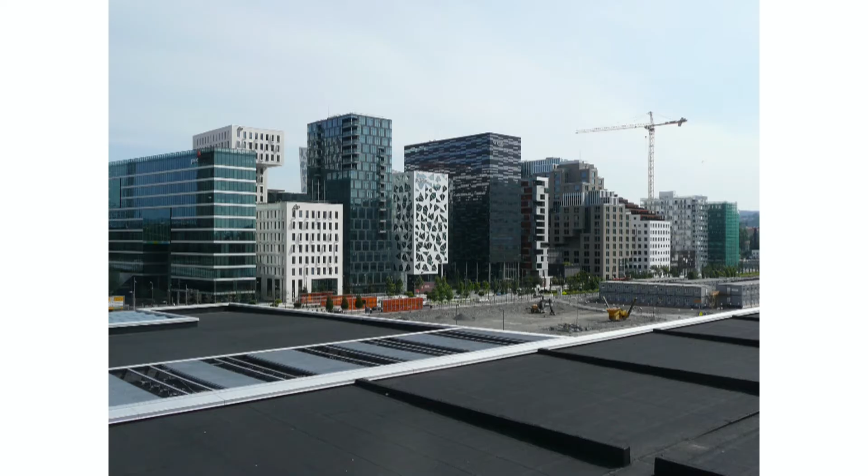They are in opposition, in contrast against the traditional buildings, and we shouldn't be afraid of this contrast.

This Philharmonic Hall in Zaryadye is different from anything that surrounds it, but 80% of a city consists of buildings that are different, and constructivists in the 1920s understood that if we have one high-rise and it's like a disruption in the city, in a new city...

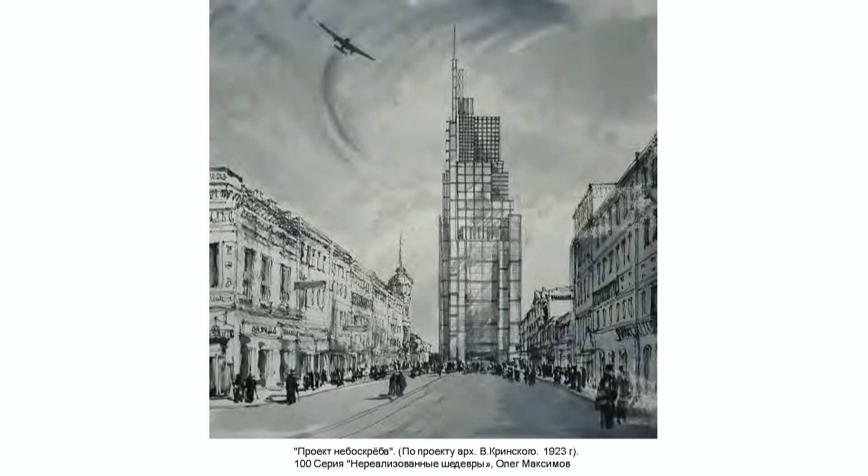Then you think about what do you do with the remaining 70 or 80% of the city. And in my buildings, I always ask myself the question: can this building become a disruption, or should it be a background for something else?

Using this counterpoint, this opposition, is how we build our cities. If the building is in opposition to everything around it, it's complicated in its shape and form. It could be complicated in its materials, can have some unusual materials.

For example, in Nevsky Prospect in St. Petersburg, if we have 100 buildings, we see only 16 houses that stand out.

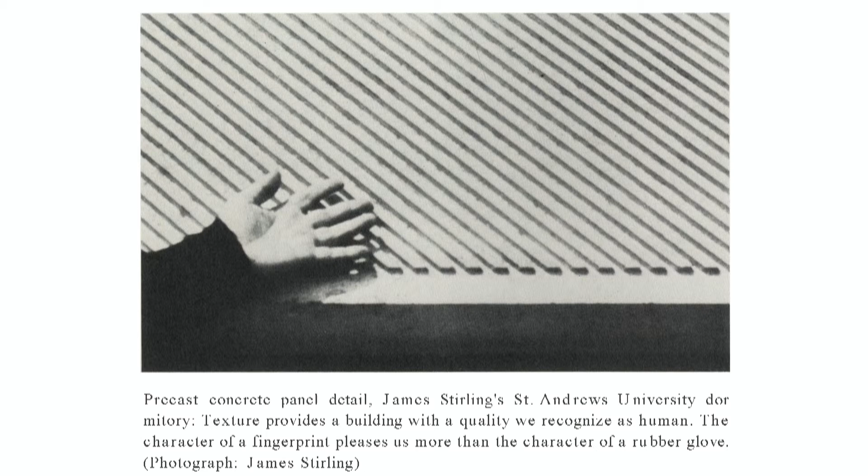84 buildings, they are quite boring and regular, but they are still precious to our eyes, because as Stirling used to say, they live their own life with their own surfaces. Their facades have fingerprints, not the prints of a rubber glove.

And such buildings always existed. You used to work with materials, with details.

Every facade has its own structure, and we have fingerprints here, not prints of rubber gloves, and this is what creates attractiveness. This is a good addition to regular rectangular investment architecture.

This is that skill that we really need to use in new cities. Otherwise, they will turn into this chaos of complicated, contrast-based forms that are not really close to people.

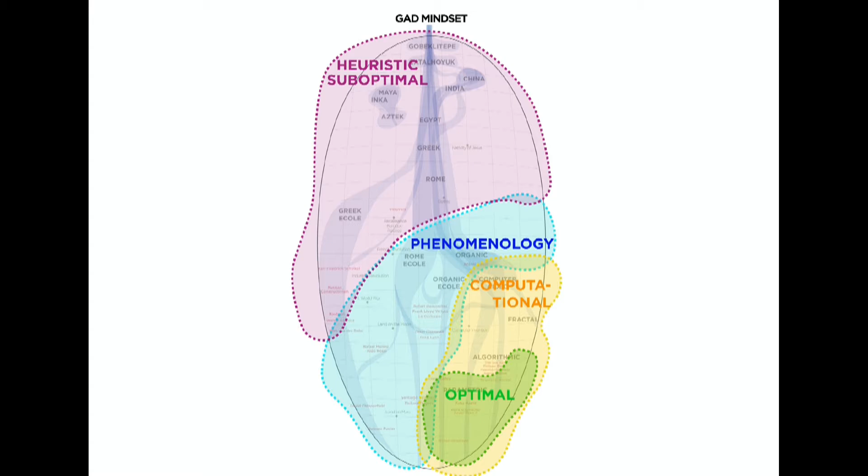We would like to organize it for young people, a young habitat, where almost 500,000 people will live. It's next to the new airport, and the city happens as another piece of new startup companies—can we show it quickly?

Because they asked about Media City, let's start with the Media City.

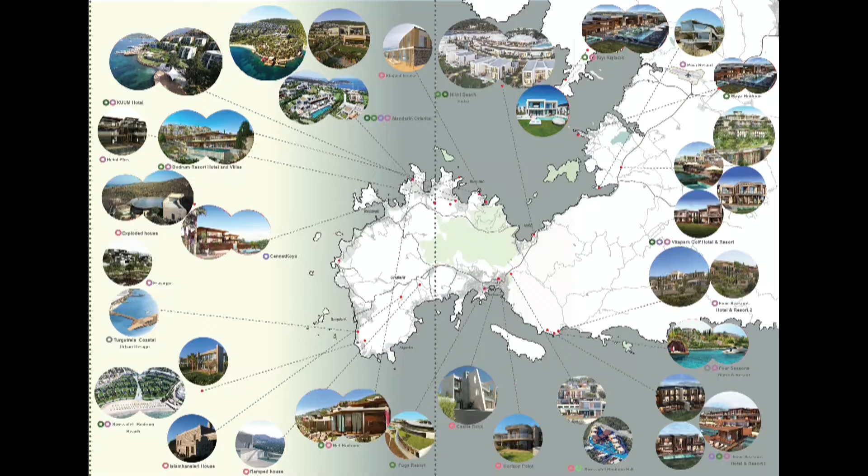We searched what is today's city, and in history, what will happen—especially a couple of things: the housing, and also the working area, and the square. We need green space, we need event space, and also we need working areas. We searched first of all how we can combine them, especially surrounded by some square.

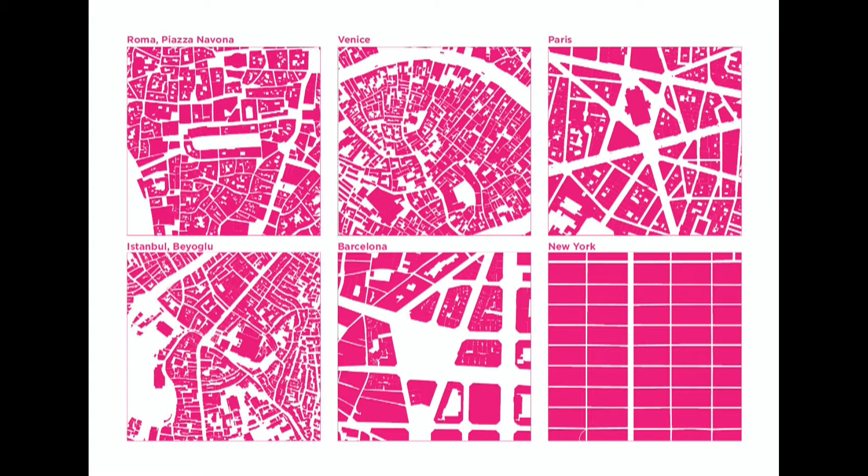You can see the different square models in the world. First one, Rome; another one, Venice, almost a flooded city, but you can see some relationship with the water and also the stone. In Paris, Istanbul, Barcelona, and also New York, there's a totally different square—Cartesian and organic cities.

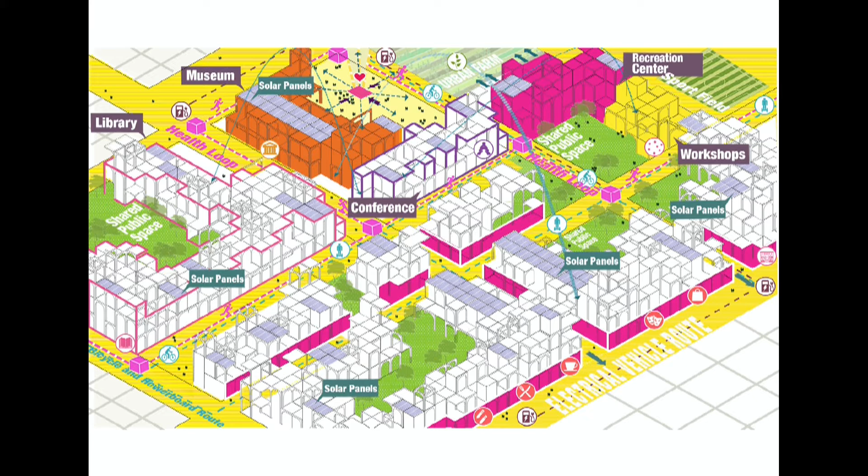We are planning to live there without cars. We don't like cars because they've ruined all cities—it's supposed to be walkable, reachable, and a livable city combined.

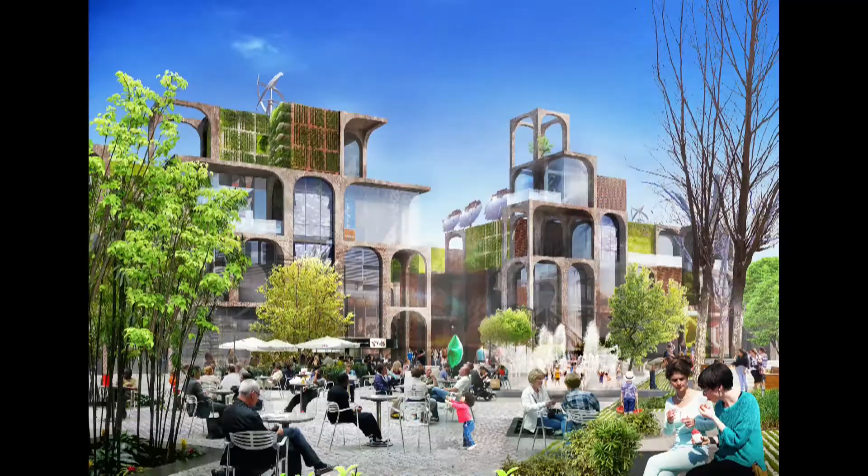This is what we are thinking about—imagine people living and working there with art and daily life, with green space and agriculture, and you can see relaxation and peace at the same time in this one city.

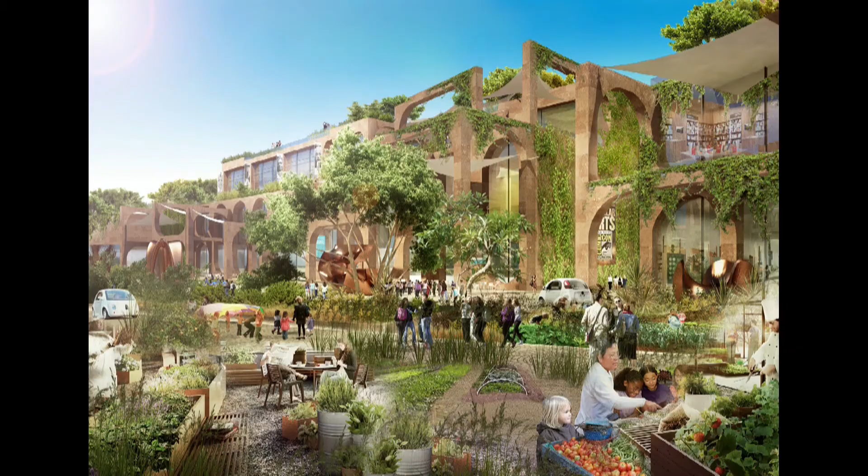Thank you, Gokhan, for showing us how these types of new developments are being addressed in Istanbul.

The question of the city and construction amidst this rapid growth has been dealt with tools from the past century, and we really need to incorporate technology. BIM is offering us the possibility to integrate all the stakeholders in construction and to be much more efficient in terms of pushing forward projects, new cities, more like the ideas of the assembly line.

To answer how BIM can have a positive impact in the development, I want to direct the question to Marek, but also later to Dmitry Rudenko, who I forgot to introduce, who is the Vice President and Head of House Building Division from the Segesa Group. So Marek, how can BIM have an impact into the future of new cities?

Thank you, Pravit. So just quickly to explain, my role within Autodesk is I work with infrastructure, principally customers and their project teams around the world, and I've also been heavily involved in the United Kingdom BIM initiative, where the UK is trying to mandate the use of digital technologies for public investments. And the reason is we see huge benefit and opportunity by leveraging new technology in how we deliver both our buildings, our infrastructure, and our wider urban environment.

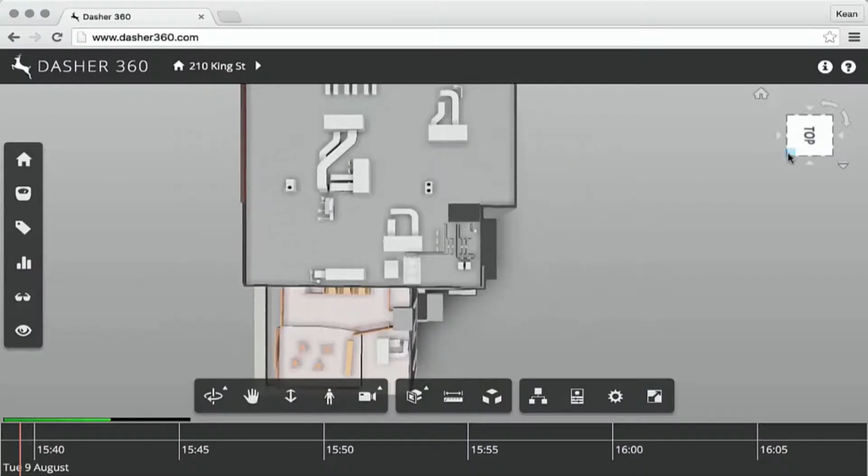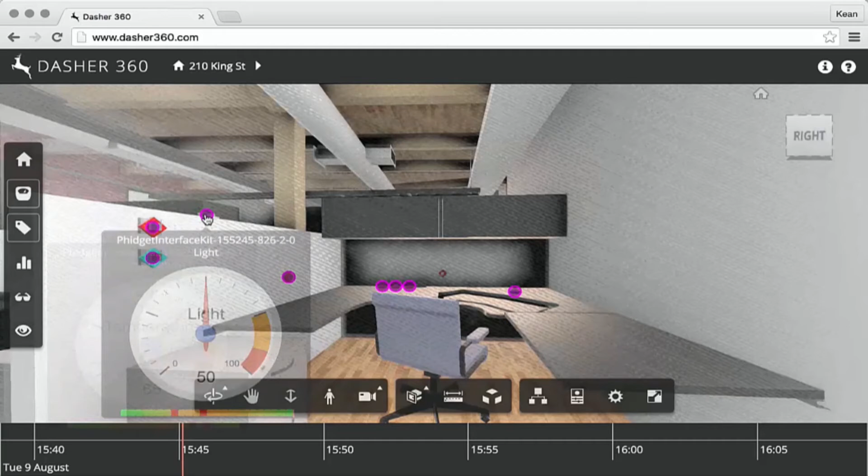This is an example of if you have a BIM, if you have a model, that gives you obviously an engineering or architectural solution. But once you have a model, you can now mix and match it with, in this case, leveraging IoT, Internet of Things, where we have sensors within a building, and those sensors are feeding information on the building services performance, which we can now present in completely new ways. So we're looking at lighting sensors showing us how occupation is impacting the performance of the light sensor. If you don't have a model, you cannot do this. So it's really saying that we must begin with basic modeling to take ourselves forward.

So now that was just a quick example within an asset like a building, but let's take ourselves outside and actually go look at the full urban context, where geospatial tools, so GIS, combined with BIM, gives us entirely new opportunities.

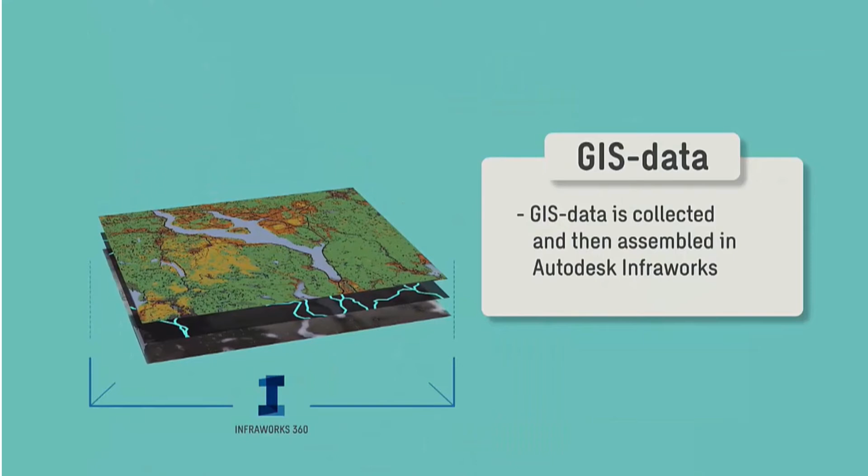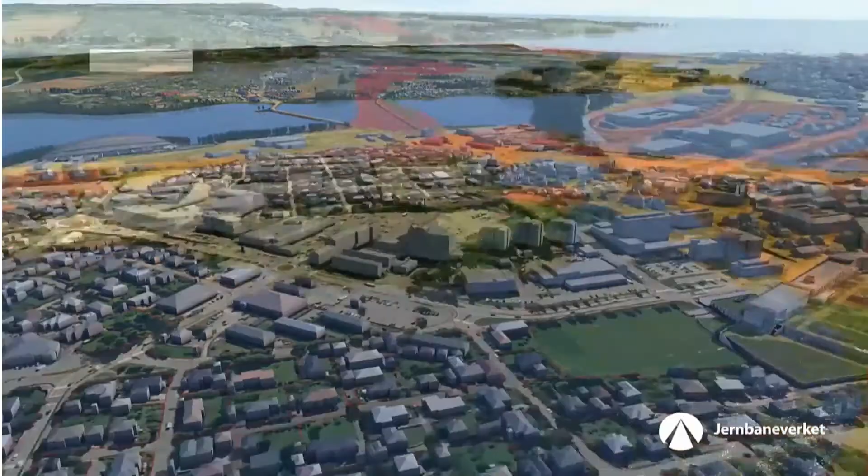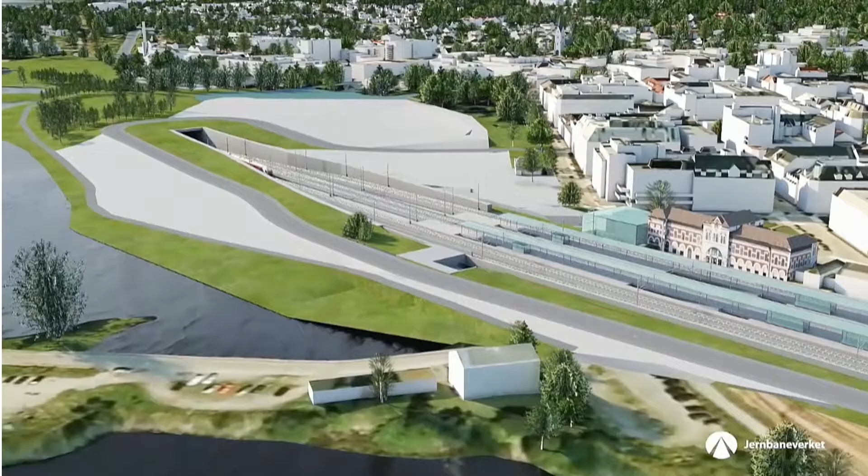This is an example from Norway, where Sweco, Multiconsult and Ramboll developed a proposal for a new high-speed rail. They needed to convince themselves as designers that they had the right solution, their investor, the rail authority, but also, most importantly, the public. Is this scheme going to be suitable for us in the future? What will be the impact on us as people that live in this area? The most important thing here was to combine as many data sets as possible, both from geospatial sources and from local design sources, to then optimize the design to fit in most appropriately within the urban context.

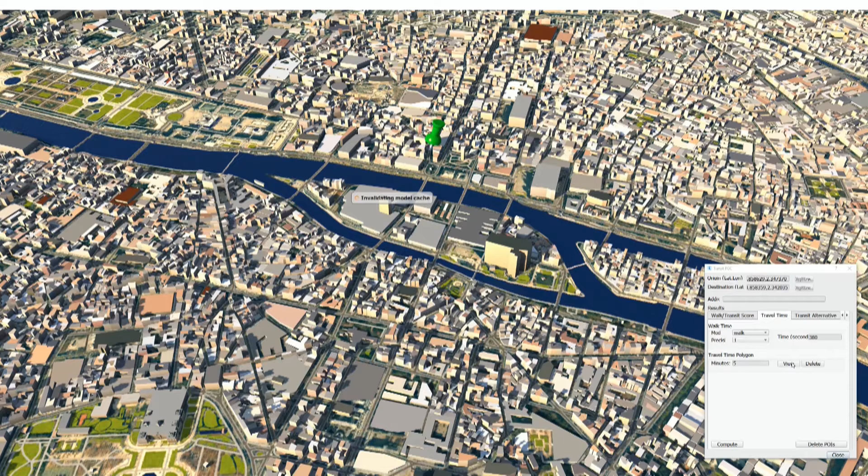Here's another example, looking at urban transportation. What is the most suitable urban transport network? Where do we have deficiencies? This is an example from Paris - it's very simple to visualize and communicate to everybody here where metro stations were within a 5-minute walking distance. Where are we missing spaces? Where do we need to invest? Where do we maybe need to change our public transport offer, whether it's to do with cycling, buses, or so forth?

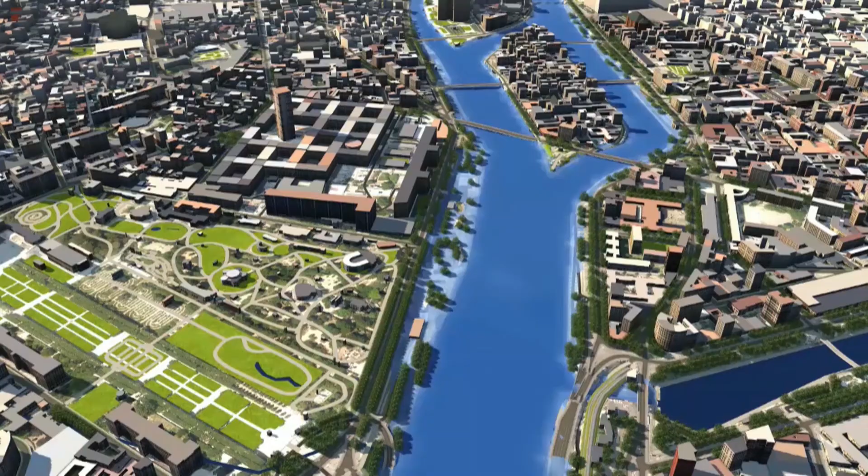Moving again into another example in Paris, what are the impacts of the environment? We are currently having fantastic weather here in Russia. We've had super weather for the last 2 months in the UK, which is very unusual for summer - we normally have lots of rain. And if you do have lots of rain, you can have impacts of flooding. Paris had severe flooding 2 years ago. How do we communicate that to ourselves as urban planners and designers, but most importantly to our stakeholders, our urban owners, but also the public, to prove why you need to make modifications?

Clicking again forward. Hopefully this will play. Oh, no, let me just go back. Sorry, it didn't play. If this doesn't play, it doesn't matter.

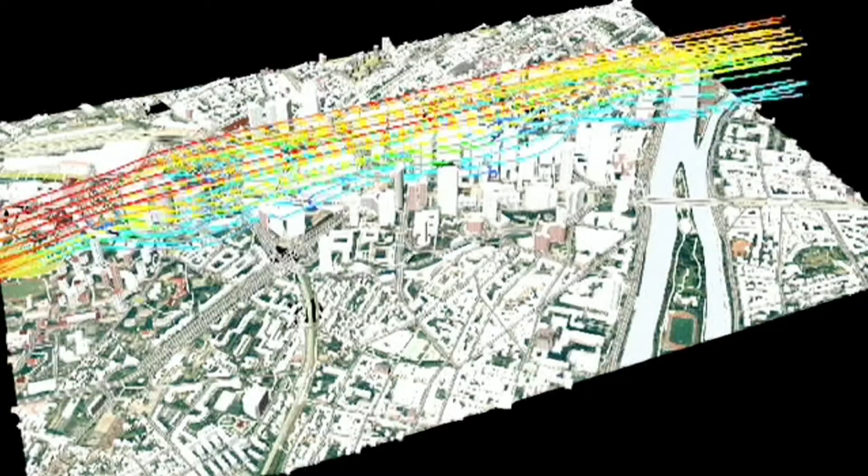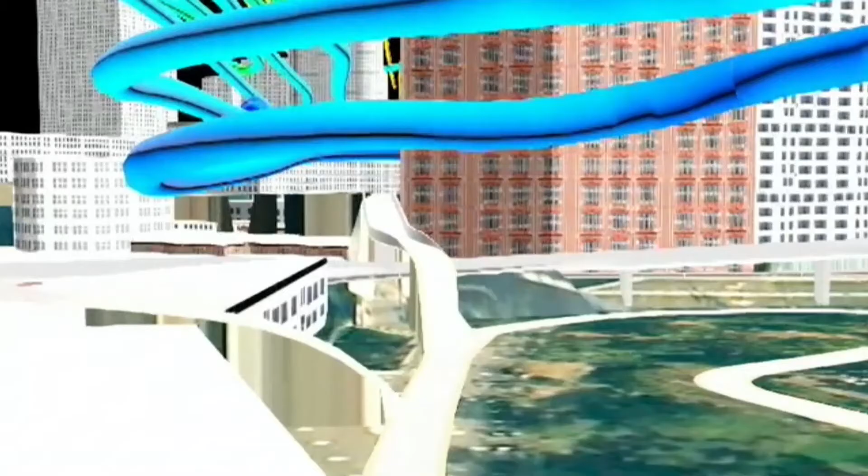Okay, there we go. So here we have the output from a computational fluid dynamics analysis of environmental impact in case of wind flow. And we're looking at how cold and warmer air moves around an urban context.

We can now visualize it not just in a very mathematical and very scientific way that is only understood by a very small proportion of communities and specialists. Everybody can understand here, where are the cold airflows, where are the hot airflows, where are we going to get areas which may be turbulent, which may cause problems for us as public users of facilities, because we're visualizing it in the full urban context.

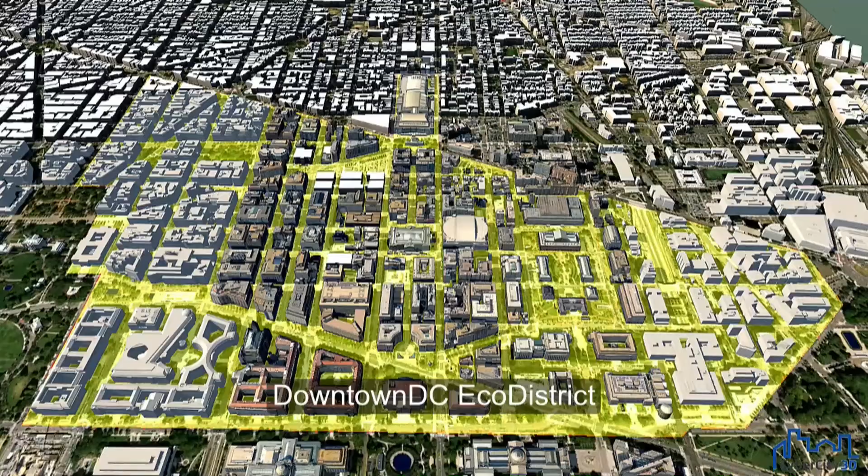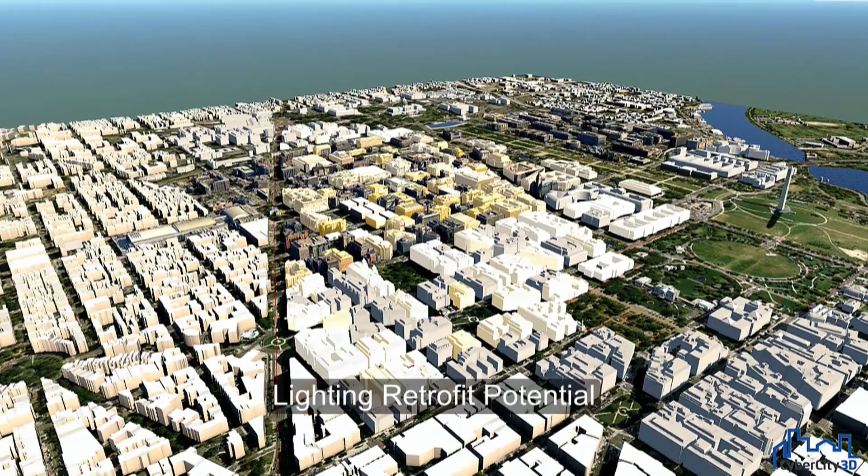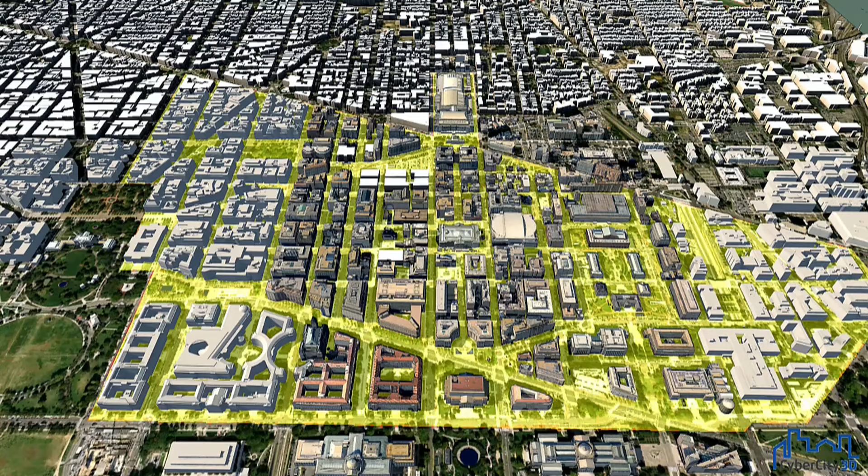Clicking again here, this is a different example. This is an example from Washington, D.C., where there was some analysis done on public sector owned buildings and what are the opportunities we have to retrofit them, change the lighting from being high energy to low energy. Where could we change the glazing to provide a more optimized energy performance within the buildings that we own? So this is how to analyze investments and actually see them in the full urban context, because that gives you an opportunity to plan better the construction process to be more efficient.

Now, some of you may be looking at this saying, well, that's quite fantasy, that's all in the future, it's not really what we can achieve today. Well, I would argue that this is exactly what you can achieve today. You just need a little bit of commitment from yourselves as engineers, constructors, designers, and investors to basically say, can we do this differently? Should we do this differently?

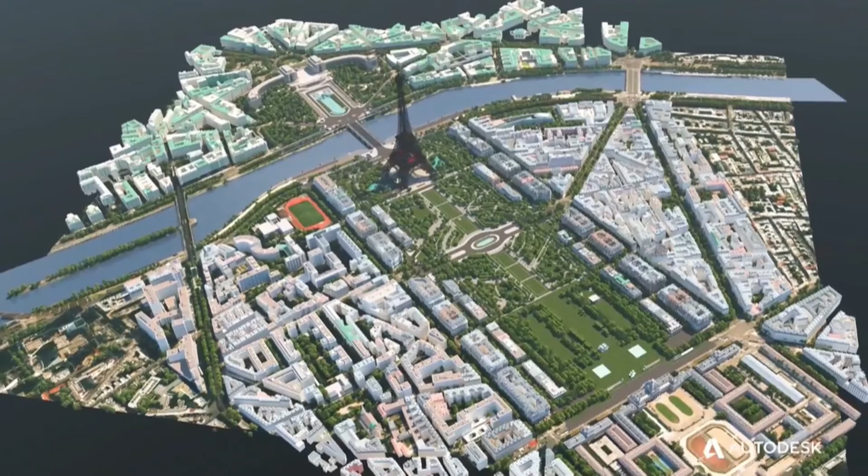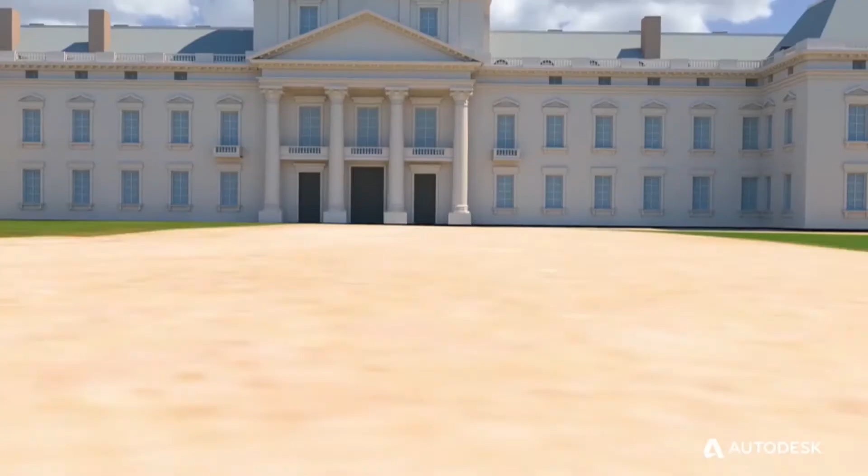And I'm going to drop back to another example of Paris, where Paris is going to have the next Olympics after Tokyo, and the area around the Eiffel Tower will be radically redeveloped to be a showcase area for all visitors to the Olympics. And this is a model that we supported the city of Paris on developing.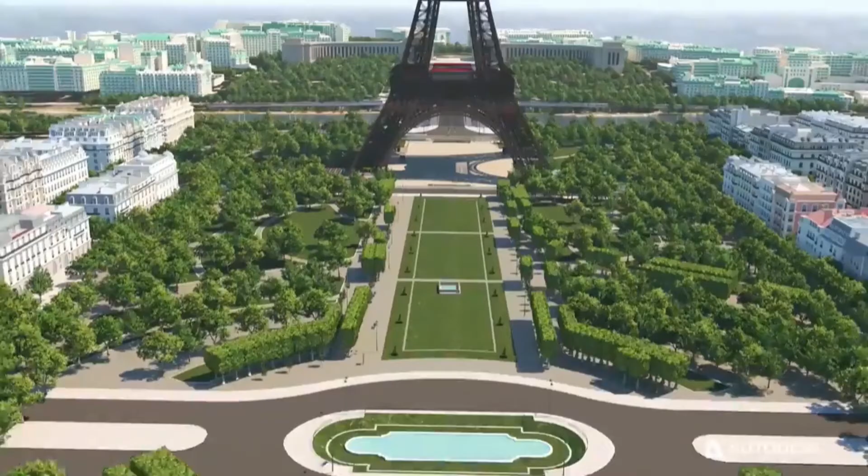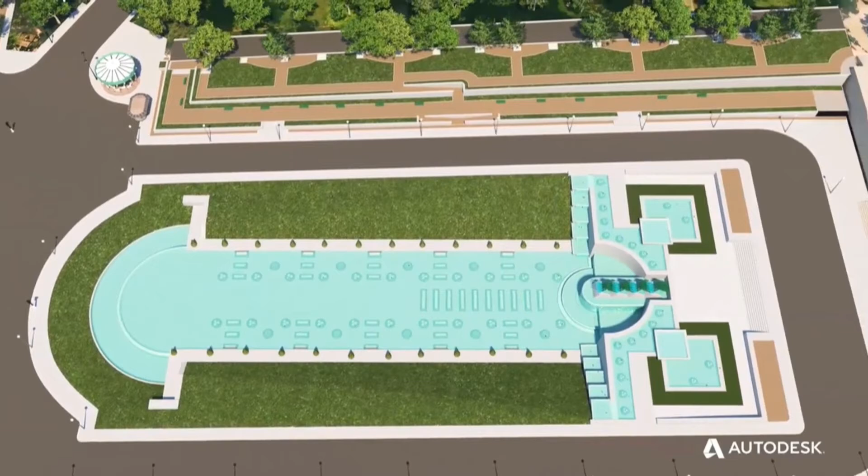It's made up of many terabytes of data. There are tens of thousands of trees and buildings modeled. And this model is being given to all of the consultants, the architects, the engineering service providers, and the contractors to use as their basic reference to design modifications, both to roads, metro infrastructure, new buildings.

Facilities for the Olympics. And I will ask you a question. Would you rather design in this method or in paper and pencil and 2D sketching?

I would say that this approach is extremely attractive to the engineering community and the architectural community, as well as to the public, and most importantly to young people, who we must attract into our industry, because our industry is very unattractive to young people.

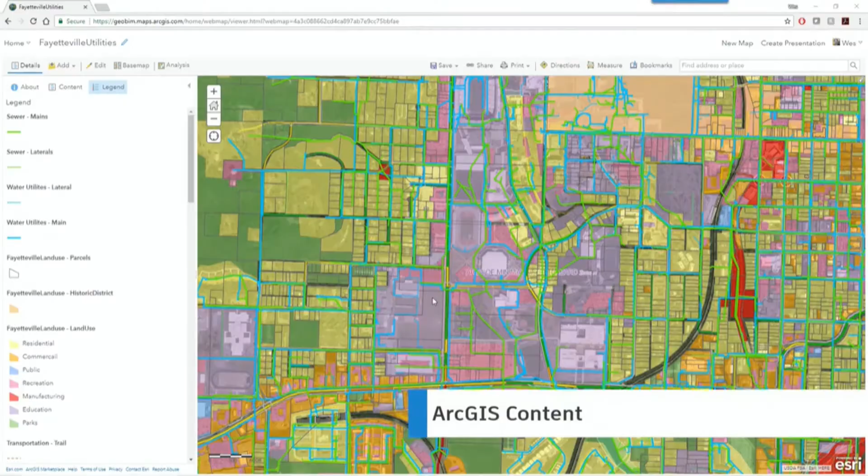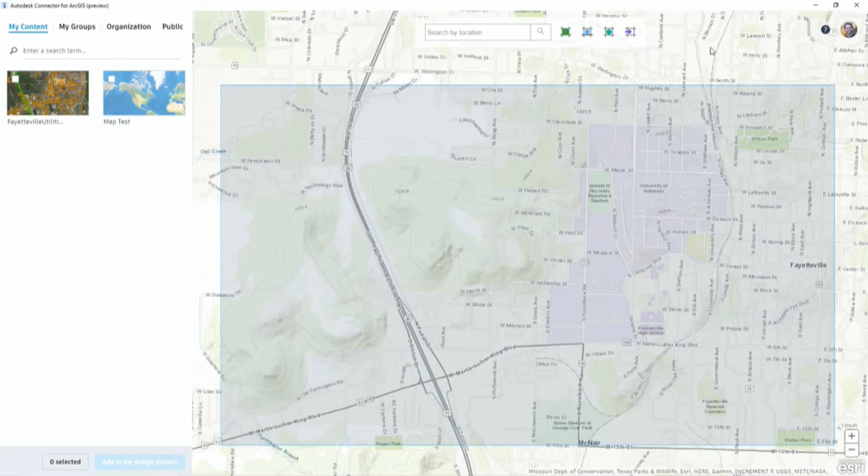And finally, just to mention something that we have just done, so this is a week old. Autodesk is obviously a very large player in the engineering and architectural design world, but also Esri is a large player in geospatial systems, and pretty much every city, every town in the world may have a copy of an Esri or equivalent solution.

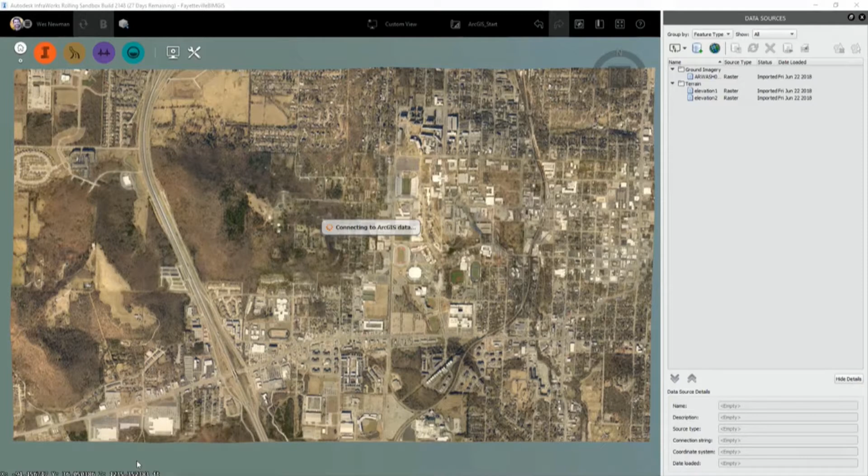We've designed a toolkit now to connect the two. So now if you've got good, rich geospatial information about the urban environment, which pretty much every city, every town has, because they'll have a GIS, and that is sitting there being wasted because it's being used by a small community, the people that are the geeks in the GIS world.

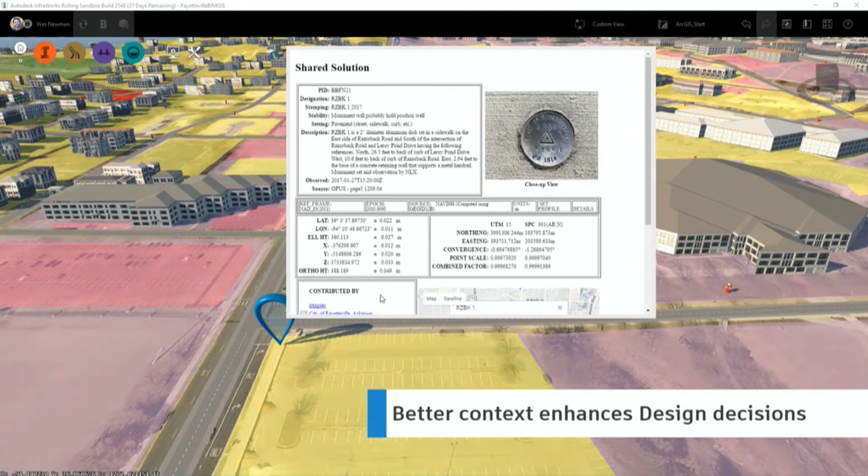What we can now do is we can pull that data and start building very rich urban context models with a very low effort. So what might have taken months to build can now be done in a matter of minutes. I mean, literally, it can take you 10 minutes to build a city model. You sketch an area, and then you pull the data.

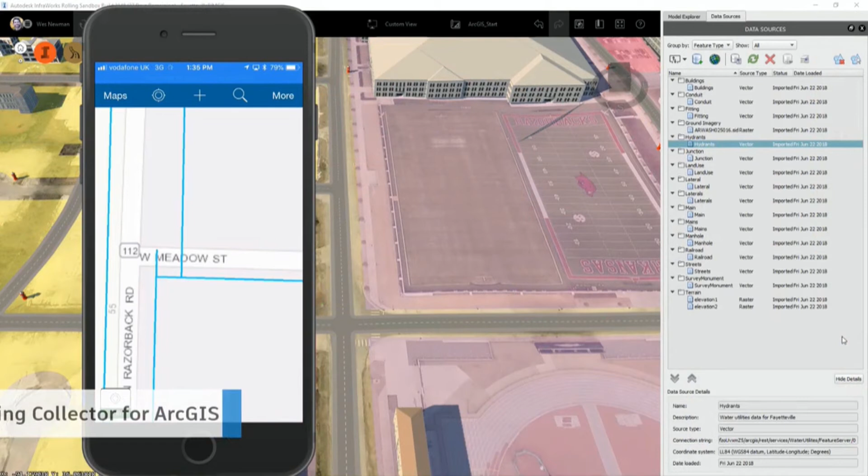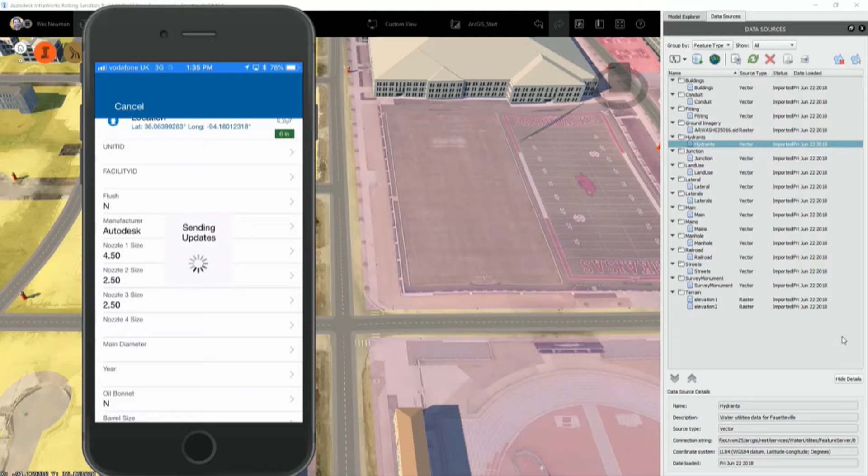And we can now go out and do field-based inspections. And when the people are using field-based inspections in one toolkit, they can do an update, and that information updates the geospatial database, and all you have to do then is a refresh within the full rich context model, and we now have an updated live model.

So what I'm talking about here is the opportunity to change how we design, construct, and operate the urban environment within which we live by leveraging digital technologies. Digital transformation for urban planning, design, construction, and operation is available to you here today and now.

Thank you, Marek, for showing us the possibilities of introducing BIM and other technologies into future city making. And now I want to invite expert Denis Davidov to explain how these technologies can be incorporated into Moscow.

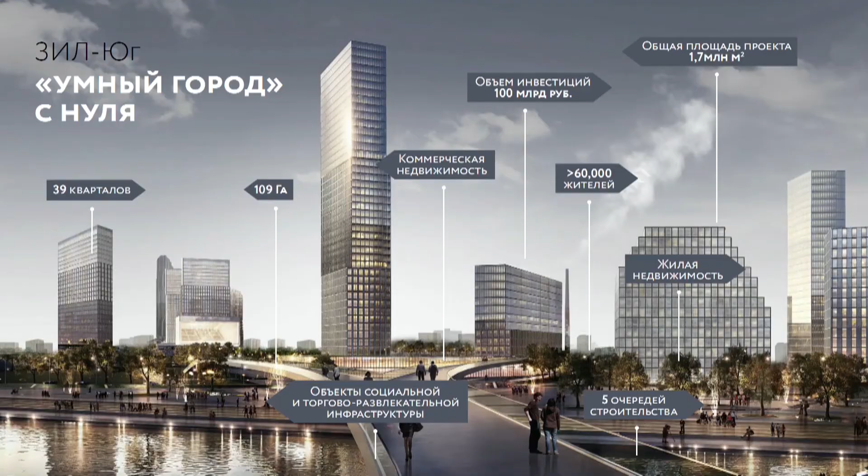To start from the beginning, the DNA should be there from the start, for example. Then only the technical task - we submit this technical task to architects and engineers. And then everything will be very well built in, and it will be in the apartments, and people live in this smart city environment and use it. Digital city and digital environment - it's the future.

So this is our big project, ZIL-Yug - 109 hectares and 1.7 million square meters. We need the help of the professional community, the government. If you have projects like this, like we have, if you have a working team, we can integrate our work and improve our quality of living. Thank you very much.

In the vision from the developers' world, this challenge of new cities and new developments requires that we use materials that have a low impact. Thanks to advancements in construction technology, wood is becoming a viable material to build larger and larger structures. I want to invite expert Konstantin Blinov from SDOC to tell us about the possibilities of wood to address the challenge of new developments.

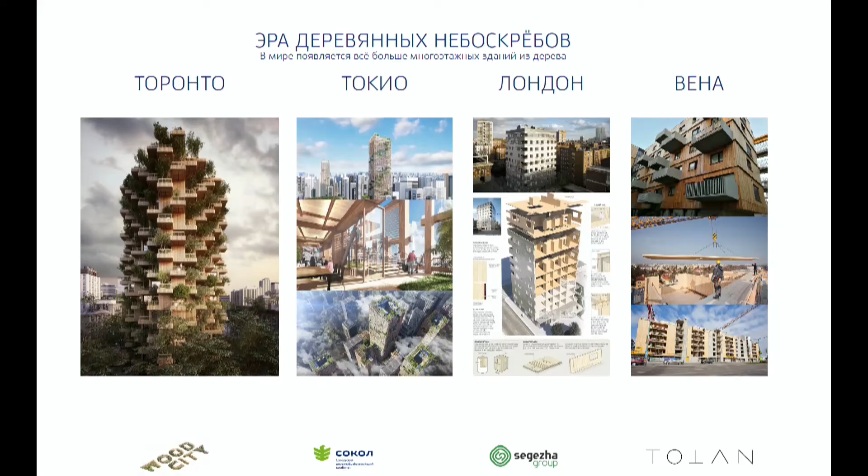These materials can be used very widely in urban construction. For example, CLT panels can be used very widely - they're already used in European cities. On the slides you can see examples of high-rise buildings using CLT panels in Europe or Canada. We decided to use them too, and make a big project with CLT panels.

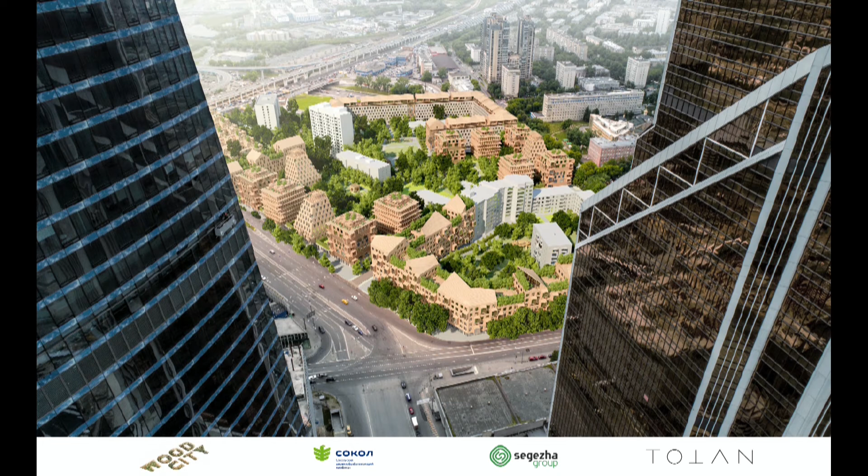This is a project of the Kamushki district. We retrofit the current construction. The concept is done with the help of a creative team led by Totan Kuzembaev. We use different housing types here - CLT panels are the main bearing constructions. With this project we try to experiment and apply wood as a renewable resource.

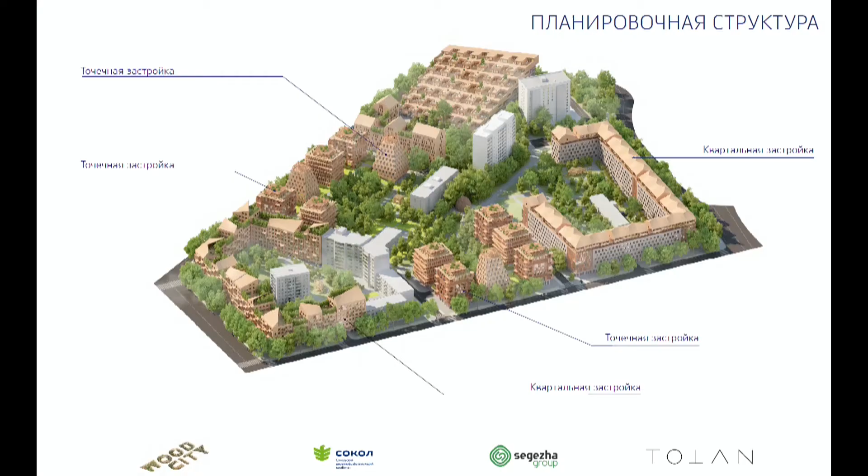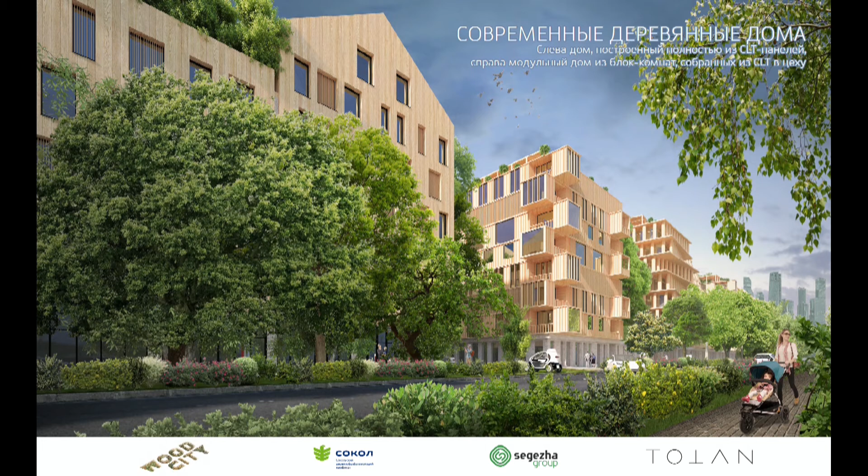This is very good to use, because here we can create good, environmentally friendly districts. You can see here an example of this constructed district neighborhood - these are not high-rise buildings. Here you can see the structure - we can have modules, and also houses with glued wood construction, so different types of buildings.

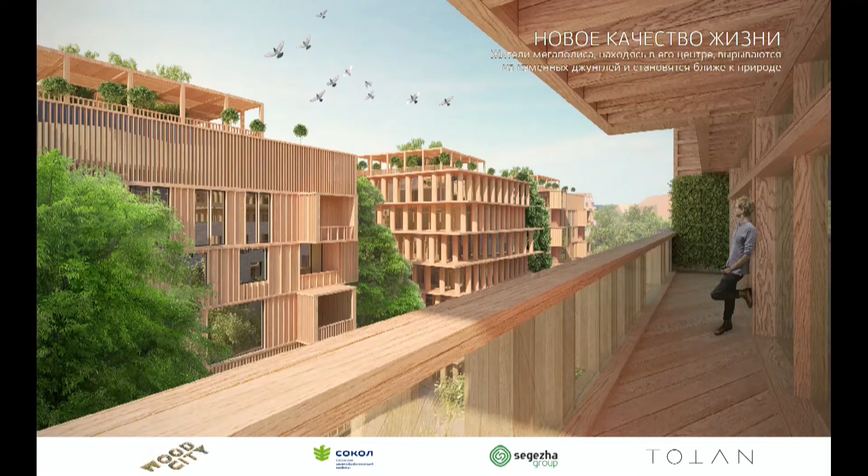I want to say that the future, if it does not start today, becomes the past. That's why if you want to implement the technology, architects should be well armed with information about new materials, and technologists have to also come up with new ideas. Only with this can we realize these projects. We have to do this together - as was said before, we should collaborate. We should have one task for all.

Here you can see different types of projects from the Totan Kuzembaev team. I think these projects are very interesting for developers.

Speaking about legislation, we are also making headway on this, and I think we'll achieve results. So we hope that we'll also have high-rise buildings soon, not only 3-floor buildings.

Thank you very much. How would you go beyond the single-story house into big developments.

As we started the session, the question of cities and future developments is perhaps the biggest challenge for humanity. We try to think of it in a linear way based on how we've been solving it until today, but this problem will be addressed in a different way from diverse professions, not just architecture, urbanism, or construction technology and developers. Neuroscience, the space industry, the automotive industry will all play an important role.

And I want to invite Carlo Ratti from the Senseable City Lab to introduce us to how we can start to think about these alternative future visions for the city.

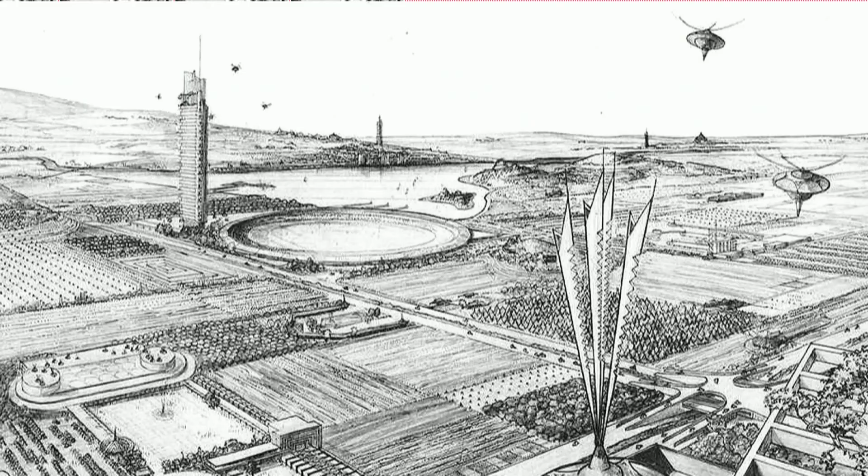If you look at that, it also informs cities in the 20th century. It's no surprise we saw things like Frank Lloyd Wright's idea of Broadacre City, expanding into the countryside. But when you look at that, it left as a legacy the destruction of the countryside.

It left us as a legacy the destruction of a lot of the spaces around the city—this kind of endless suburbia we see all over the world, particularly in the United States. So really, by trying to bring people closer to nature, we actually destroyed nature.

I think today the challenge we have is a different one, and that comes from my city of Milan—Stefano Boeri's vertical forest. It's about how today we can do something else.

First, let's be clear again: in most of the world, cities are not growing. They're only growing where we're still moving from the countryside to the city. So the question is, how can we bring more nature inside our cities? It's exactly the opposite of the 20th century, where the city expanded into nature and destroyed it—how today we can bring nature closer to us in the city.

So I want to share with you some of the projects we've been doing. I wear two hats—I run the MIT Senseable City Lab, but I also have a design office, CRA.

So I want to share with you some of the design projects we've been doing. That was something we did a few years ago with Patrick Blanc, who invented the vertical garden.

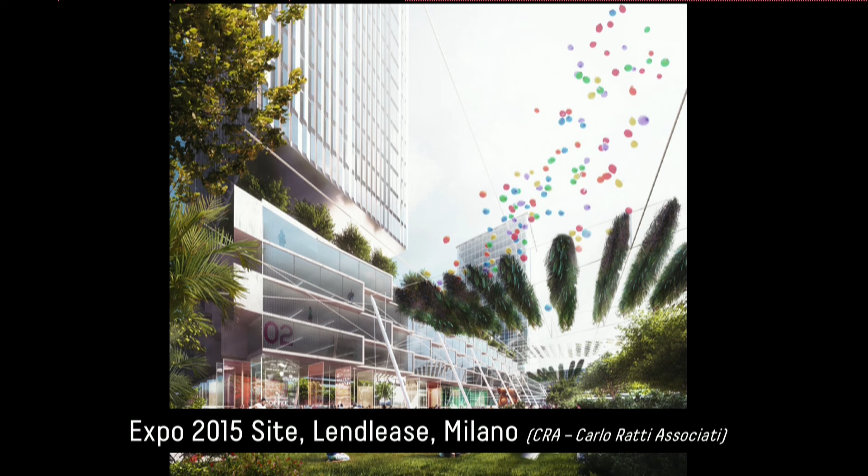There's something else. We're working on the transformation of the former World Expo site, 2015 in Milan, into an innovation district. It's called Mind, with Lendlease, the Australian developers. What was the center of the World Expo, the Russian pavilion, was not far from there. It becomes a long linear park, but an inhabited park where people can go, keep on working, and again enjoy nature.

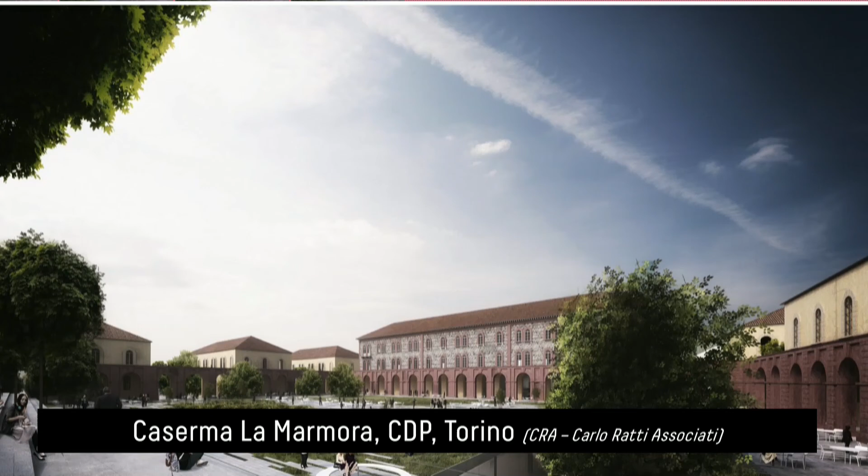And this is another project we're doing, converting old barracks, again by bringing a green space into the middle of them.

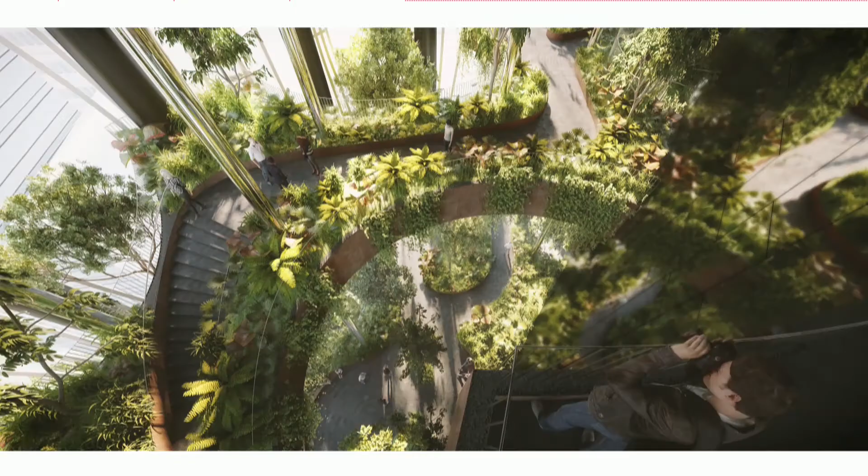You can see here some of the spaces. It's under construction, in a couple of years it will be finished. I was on site last week. You see how we try to bring nature inside the building, you see it from the outside, but when we are inside, you have spaces such as this one, this kind of public space. This is the lobby at the beginning.

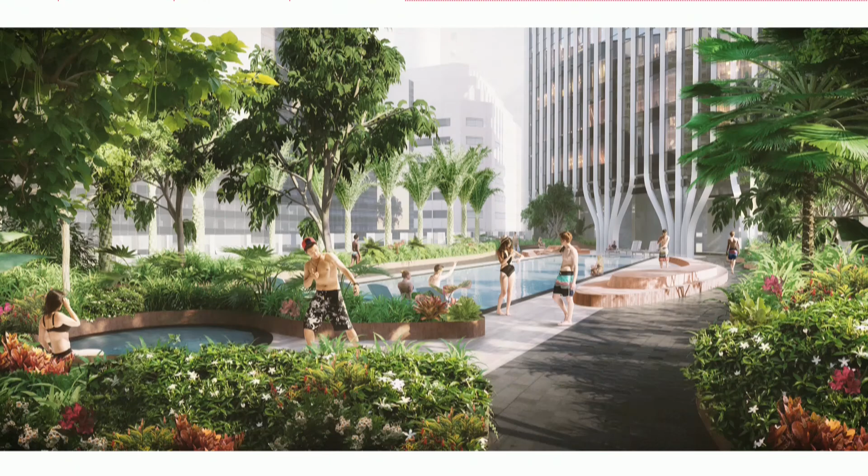And then you can see some other images of nature coming back closer to us inside the building, in the core of one of the world's densest cities, such as Singapore. That's a project for Capitaland.

And I wanted to finish with this. That was an experiment we did at the Milan Design Week. As you know, Milan Design Week is a big event dealing with design. It happens in Milan every year in April. This year we were asked to do the opening installation. That's the main square of Milan, you see to the left the cathedral, the Duomo, and to the right the Royal Palace. So that was our site.

Our initial idea was, can we do a pavilion where we have 4 seasons at the same time? It's a little bit like in a beautiful park, when you play with climate and seasons. In this case, can you do it in a sustainable way without using any additional energy, but the energy you get from the sun? Can you do it to actually modify climate and achieve two things: bring nature back to the city, but also deal with microclimate change? By managing the flow, as you're moving through space, you go from winter to spring to summer to fall.

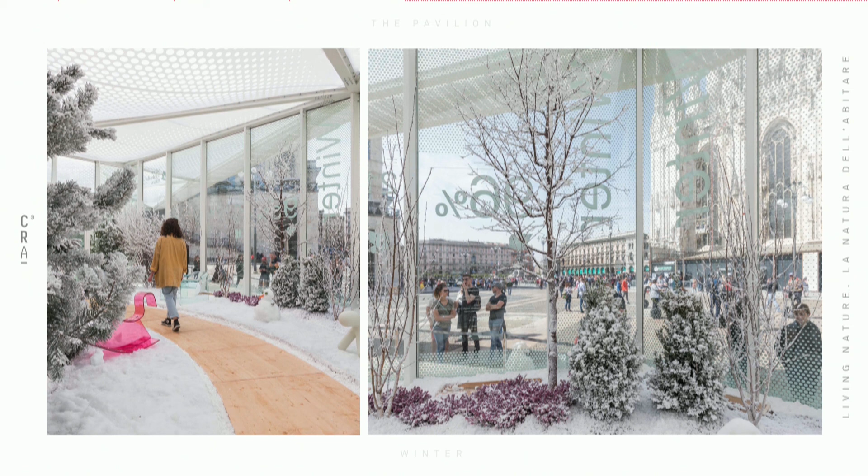These were some of the initial renderings, and this was the built pavilion. It was actually a big success at Milan Design Week. You could have snow, real snow, on one side, and then on the other side you would have spring with flowers, and also summer, a very hot and sweaty summer, like a real Milanese summer or Moscovian summer. This was a short video of the pavilion.

Can we hear the sound as well? Hello?

Okay, we missed some of this, but anyway, the point I want to make is: the 20th century has been about nature being destroyed by the city conquering the countryside. I think today our challenge is different. It's actually how can we bring nature closer to us in our cities?